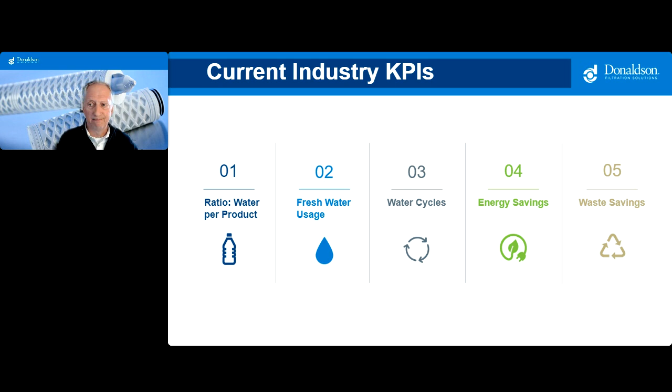Steering the conversation back to sustainability, let's break this out into parts. First, how much water is being used to manufacture your product? This then leads us to examine the overall usage of fresh water and tools on how to reclaim or recycle this water. This can lead to potential savings in energy and reduction in waste. Later in this presentation, we will have a case study that looks at this from the perspective of a CIP system. But before we go any further, I'm going to pass us back to our moderator, Seth, for our first poll question.

Thank you, Scott. All right, folks, our first poll is now live. And the question is, who is responsible for the measurable impacts of operational efficiency in your plant? A, maintenance manager, B, production manager, C, quality manager, D, all of the above, or E, I don't know. Please take your time to carefully consider each option.

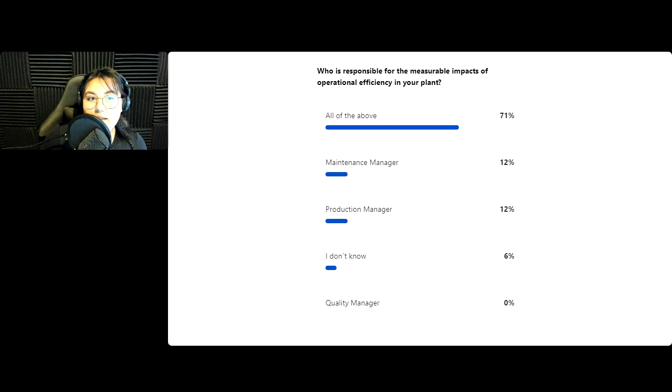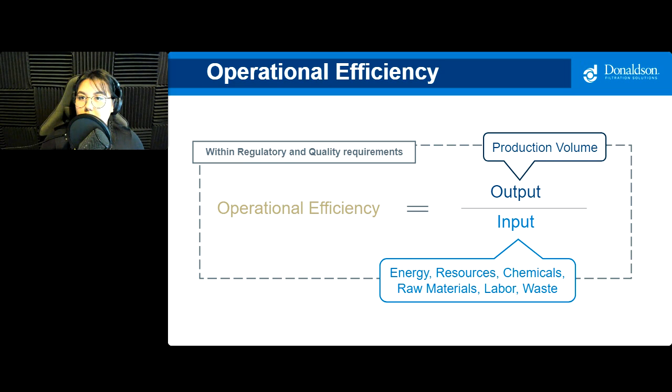Thank you, Seth. And to those who answered our poll question, I'm very happy to see the results. So let's look at operational efficiency. Here at Donaldson, we define operational efficiency as having the ability to reduce waste in time, effort, and materials as much as possible, while still producing high-quality services and products. This all must be done within the strict guidelines and regulatory demands, both internal and external.

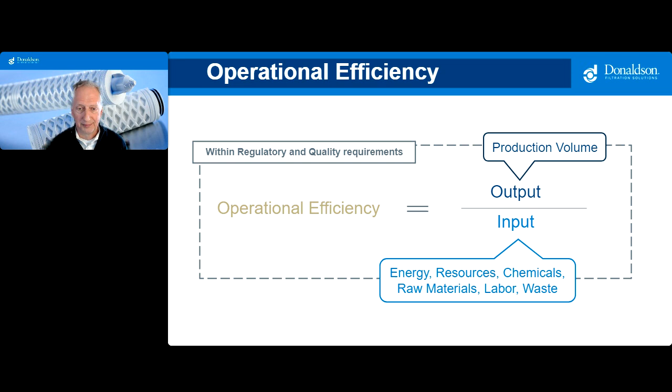To help unpack this concept a little further, I'm going to pass this over to Dominic, who sits in our manufacturing location in Haan, Germany. Hi, Dominic. How are things today? Hello, Scott. Yeah, things are very good in Germany. It's very sunny today. So yeah, let me also welcome everybody to the webinar today from my side.

And as Scott already mentioned and introduced our topic of today, operational efficiency, we want to break down that concept a little bit more. So how do we reach efficient operations in our productions? We categorized it here into three big groups: the process, the technology, and the people. On the process side, first, we need to build all of our installations with efficient design in mind from the beginning. And that usually also leads to concepts like automation or standardization, because only with automation and data collection, things like predictive maintenance and downtime planning become feasible and much easier.

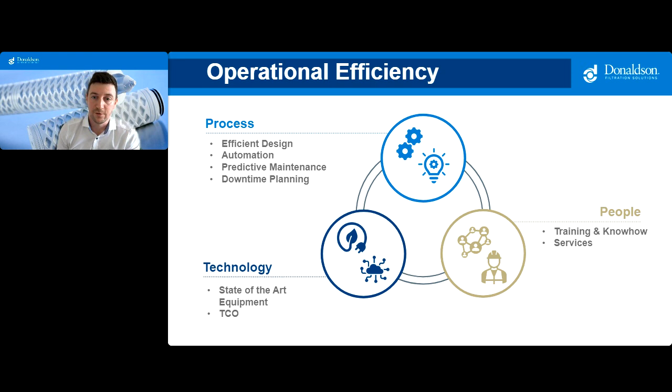On the technology part, of course, we need to invest in state-of-the-art technology to keep up with the demands of the current industry, while still keeping a very close eye on our total cost of ownership, or TCO. And probably one of the most important factors in how to reach operational efficiency are the people in our plants. They need to have the necessary training and the necessary know-how to perform as efficiently as possible. And all the necessary services, be it first-party or third-party services, need to be in place.

So the concept I just showed is basically applicable to all of your process equipment. And in the next chapter now, we're going to look especially at how to apply that concept and those principles to filtration. So what is filtration's contribution to operational efficiency?

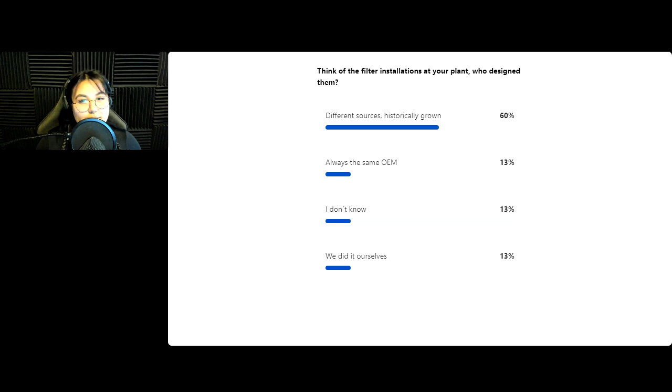Thank you, Seth, and thank you everybody for answering that question. I think what we see here, that different sources and historically grown is the most clicked answer, is very representative of what we see all over the world. Because most filtration installations have historically grown and were not really designed with all the influencing parameters in mind, which you can see here on the slide. Because there are so many critical parameters we need to take care of when we are implementing a filtration solution.

The one most people think about is the filter lifetime. A filter needs to last as long as possible. So filter lifetime is very important for us to keep our TCO, our total cost of ownership, in check. And that usually also means we need to have low differential pressures, which are mandatory for low energy costs. But there are many other connected resources that we also need to take into consideration when we are talking about total cost of ownership. The filters may need to be cleaned with chemicals, or they need to be sterilized with steam or ozone.

And every single one of those steps will come with labor, and labor also contributes to your total cost of ownership. But most importantly, we can optimize filtration installations for cost savings as much as we can, but they are still a critical food safety control point for your product and process integrity. And that is because they are removing those bacteria, they are removing those particles from your product or process.

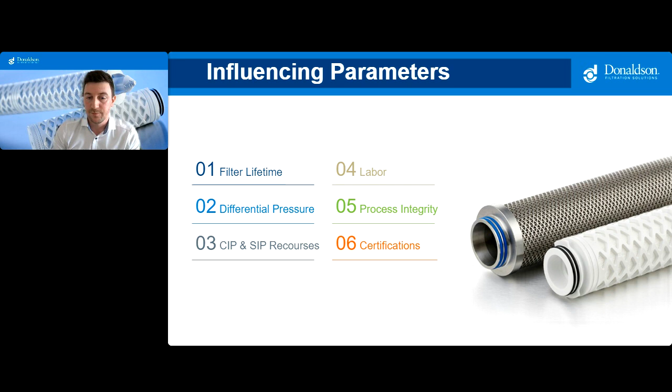So what I want to do is pick some of those points and go a little bit deeper to see what the actual impact is we can have on that. First, we can have an impact on resources. Probably many of you know about the influencing parameters for cleaning equipment with chemicals, the so-called CIP process. Because to create an efficient cleaning process, you need the right temperature, the right contact time, the right concentration or type of chemical, and you need a mechanical process of having contact with your cleaned surface.

So that means you either increase the temperature, the time, or concentration to increase your cleaning impact, which means you will increase costs. And if we now look at, for example, liquid filtration, those can usually be regularly cleaned with CIP steps. So once they have built some differential pressure, you can do a CIP process and that differential pressure can be reduced again. So the key now for most efficient and cost-saving cleaning processes is to make data-driven decisions.

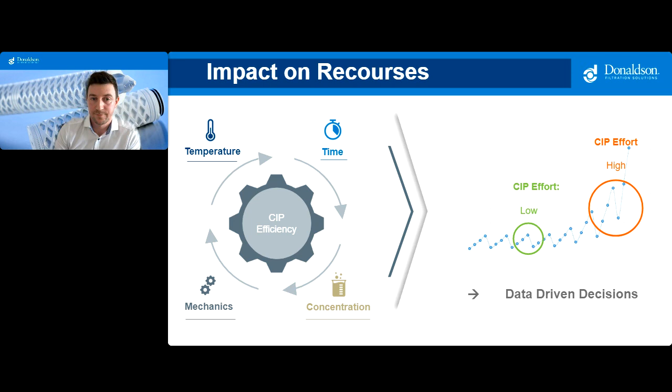The next one here is impact on energy. And I want to tailor this a little bit more to compressed air installations. So here we really want to focus on your compressed air lines, because they tend to have much unnecessary energy loss that can actually be addressed. First point here is leakage control. Any small leakage in a compressed air line can create an energy loss, and that can be directly calculated to a cost loss per year.

So you can see here an example in the table of a 1 square millimeter leakage. Imagine you have multiple of those leakages across your line and they are not attended. That can lead to quite a big cost impact per year. So regular leakage controls are mandatory for an efficient compressed air line. Also, any pressure loss or differential pressure in a filter installation correlates directly to an energy impact. And there's kind of the rule that 1 bar of differential pressure in your line will roughly translate to 10% higher energy demands.

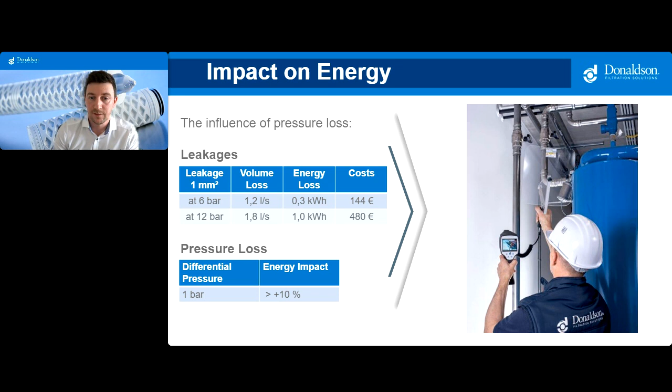So I think all of this shows pretty much that we need to investigate all those operational efficiency parameters we showed before, the process, the technology, and the services, to address the efficiency. And as a last detailed point here, I have impact on waste. Because when we're looking at your KPIs on waste, this starts usually with the manufacturing sites of your filter supplier. Donaldson, for example, we follow this cradle to grave

product sustainability impact process. And through this process, our filter development teams try to better understand from the beginning and quantify the sustainability impact of product design decisions throughout a product life cycle. And this life cycle begins at Donaldson with the right material and process decisions, but it continues to our customers with the inline performance and end-of-life considerations.

So basically, as we showed before, we need to achieve high lifetimes and make data-driven decisions to reduce the amount of downtime and waste, which results when we need to change our filter way too often. So rather than changing a low-cost filter element every week, we should aim for longer changeout periods with more premium filters, measuring the cost impact not by the price of one filter, but with the total cost of ownership in mind.

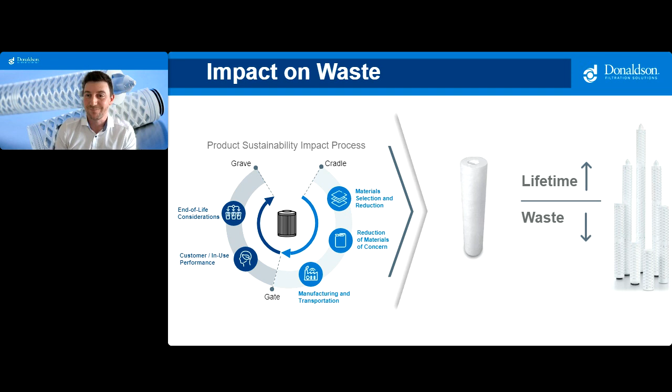So I think this was a little bit of a deeper look now into efficient filtration design, and Scott will now walk us through some real-life examples and some case studies. So please, Scott. Thank you, Dominic. Let's take a look at 4 separate case studies that I think directly relate to some of the items Dominic was just mentioning.

Our first case study really speaks to the reduction of waste, but also helping to improve filtration performance. Our first case study is from a global beverage manufacturer who approached us concerning a problem they were having with their RO membranes. Their RO membranes had not been meeting the typical life cycle benchmarks in life performance, even with the current pre-filtration steps in place.

Using our regional service teams, we conducted tests on the facility's incoming water using common methods. For example, a silt density index test was performed here at this site and determined that the total suspended solids levels were way too high. This led to a process improvement project on the RO's pre-filtration step. So pictured here is the exact drawing of the solution Donaldson provided.

As you can see, it is a manually operated but yet integrated system where we installed high surface area filter elements, commonly known as high flows. The important thing here is that it provides exceptional flow characteristics and dirt holding characteristics, and ultimately much longer service life. And the most important topic is that it provided the needed protection to the reverse osmosis membranes. This functionally led to very long service lives and ultimately increased protection to these membranes. Outcomes here, as mentioned on the slide, are reduced costs and waste.

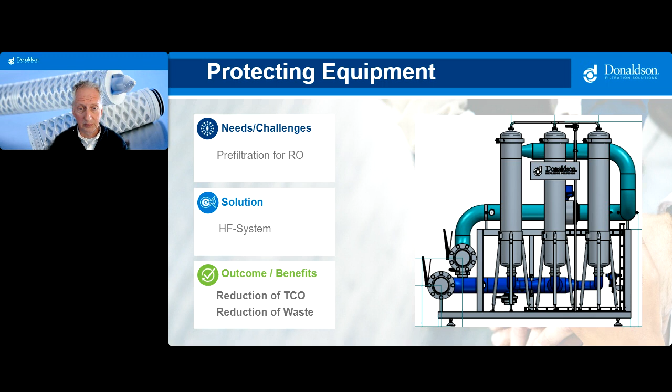The next case study is something that I've spent a lot of time on, and this is pasteurized equivalent water. Now, it's been popular within the dairy industry for many years. Now we are hearing from other beverage manufacturers on the same topic. The question is, how can I reduce the load on my pasteurizer by using alternative means? It is even more important to seek alternatives to traditional pasteurization when we look back at consumer trends that I mentioned earlier, specifically at functional beverages that have ingredients that are not heat stable or do not survive UV disinfection methods. Standing out as a possible solution is microfiltration.

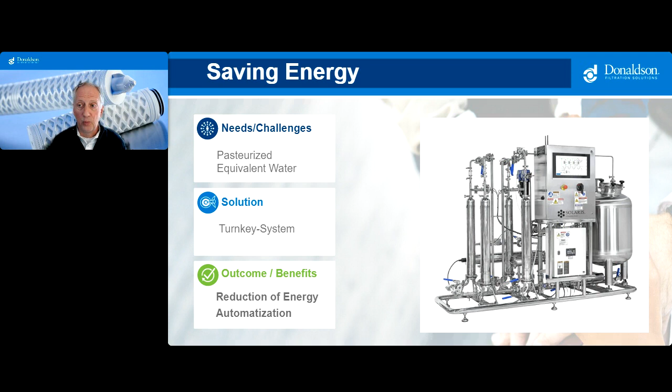Using select dead end or full flow filter membranes that have specific microbial retention values, integrated into a fully automated system like pictured here, can help provide twofold benefits: targeted energy reductions and savings in time without sacrificing product safety.

Next, we're going to look at the concept of water reduction. Now, you may recall I mentioned this particular case study. Recovering and reusing cleaning solutions from clean-in-place systems is an effective method to optimize spend and reduce environmental impact of that CIP process. Reduction is the key concept here. Reducing water consumption by recovering your secondary rinses can lead to savings in makeup water and chemical feeds. There's also the potential for the reduction of effluent from your facility.

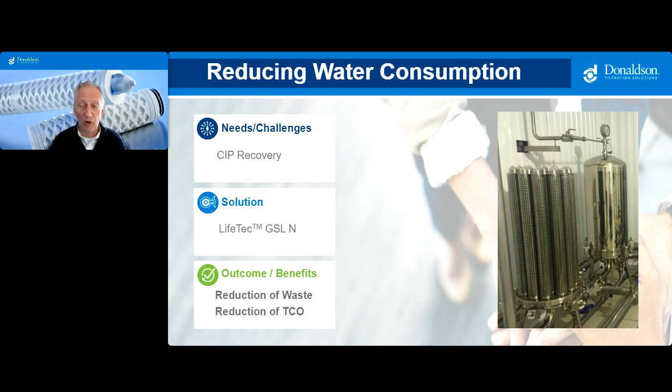Pictured here is a manifold filter system utilizing Donaldson's backwashable LifeTec GSL N filter elements. These filter elements are made of 100% stainless steel and are used to reduce solid levels before reclaiming, reusing, or further processing CIP solutions. By using 100% stainless, we can provide an efficient and robust solution that is not susceptible to typical CIP temperatures and pH values. This leads us to realize reduction in waste and overall reduction in total cost of ownership.

Saving on resources. Dominic had mentioned compressed air, and so I'm going to kind of continue with that theme. Using ozone as an agent for sanitization is very effective, especially when there is a need to produce an aseptic environment, such as found in a buffer tank. Ozone production can require compressed air. This compressed air usage can be reduced when using an ozone-resistant sterile-grade filter element like Donaldson's LifeTec SRF V cartridge.

As a standalone, this cartridge, or when used in combination with ozone, can provide optimized solutions for maintaining sterility. And again, this would be typically in an aseptic environment. And as I mentioned earlier, this buffer tank is a typical application. This optimized solution affords increased protection to product and product contact surfaces, and the implied energy savings by reducing demand on your compressed air system.

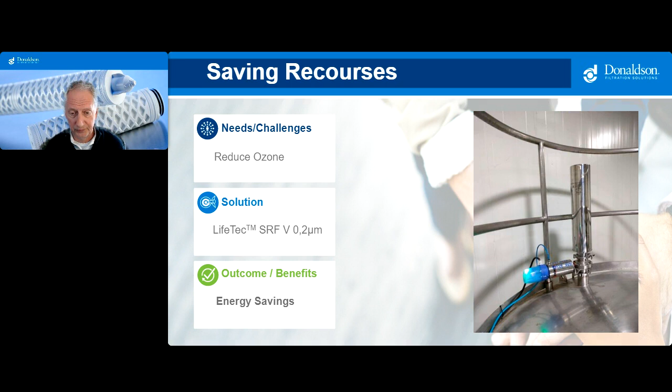Now I'm going to pass the presentation back to Dominic for our last chapter, and that's, what does a roadmap look like? Dominic: Yeah, thank you, Scott. Thank you. So yeah, let's look at your road to operational efficiency in filtration. So how can we now optimize and start contributing to those KPIs?

So first, I want to introduce you, of course, to our Donaldson teams that are supporting you on this journey. At Donaldson, we do understand the importance of process optimization and maintaining the efficiency of filtration systems with our subject matter specialists, like Scott and myself. We are providing that training and best practice, and we are in close contact with more than 100 of our local support teams who are supporting our customers directly around the globe.

Additionally, we are aligning global key accounts worldwide with our strategic key account team. So they are aligning on and sharing the most efficient filtration solutions and the know-how necessary to implement them. And when it comes to services, Donaldson does support our customers with our field service team, and they are proficient in, for example, ISO 8573-1 compressed air quality class audits, or doing leakage control tests, as we have seen before. And they are also helping our customers to implement filter management systems, which may also include integrity testing.

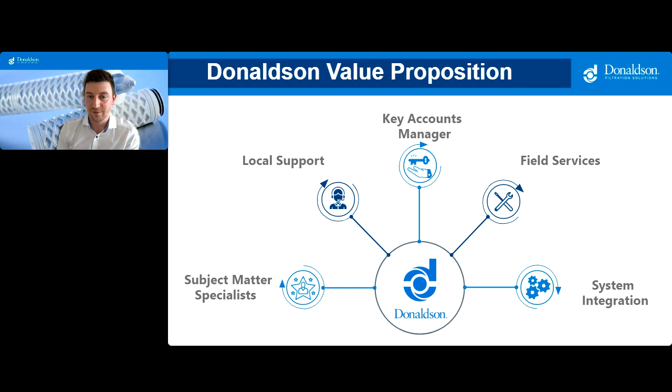And additionally, we do have on the right here our system integration team, because as a filtration expert, Donaldson also provides both plug and play and custom filtration systems via this team. And they are designing those solutions with efficiency in mind from the beginning, which is, again, very important for the process.

And then we perform what we call a technical site assessment. And we're using our subject matter experts, but also our local team and our service team during these site assessments. And we look at ways to support the integrity and efficiency of your production process and compare all filter installations to the filter best practices in our experience.

After the site assessment, you will usually get a full site assessment technical report, and that report will include an action plan, and that action plan will be prioritized. Each of those findings will be prioritized for you, and then you can execute those individual projects for optimization or addressing certain risks on a local level with your local Donaldson contacts.

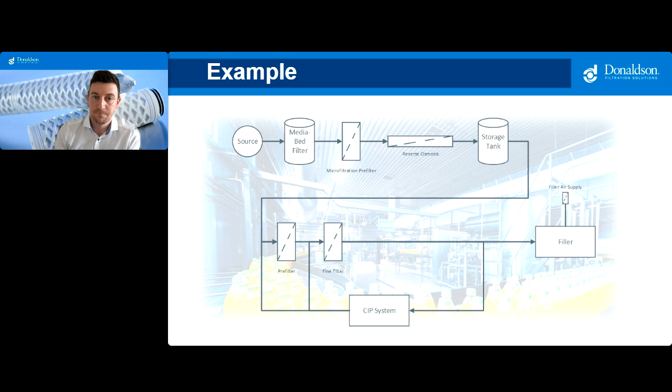And we talked a lot about the compressed air lines. So we can start optimizing in terms of energy reduction, in terms of ozone reduction, and resources. And Scott has already shown the CIP purification or CIP recovery system before in the case study, so we can also look at CIP savings.

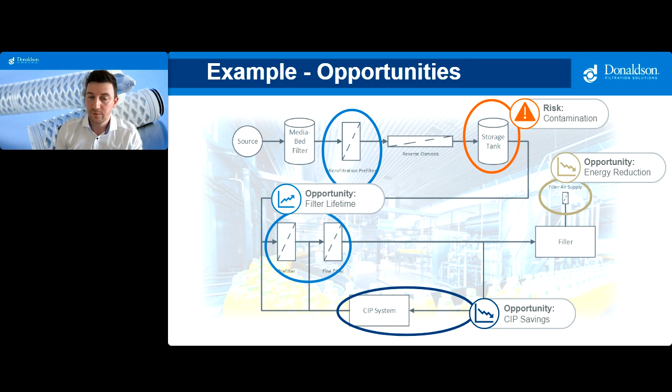And once we have addressed all this, then here you can see possible implementations after a site assessment. So they are, for example, addressing all potential risks with state-of-the-art filtration solutions, reducing the resources and energy consumption from source to application on your compressed air line, saving on CIP resources with a CIP recovery system, and optimizing the filtration lifetime and reducing your overall TCO and downtime by performing, for example, filterability tests at your liquid stages and finding the right optimized filter combinations for your type of water or product.

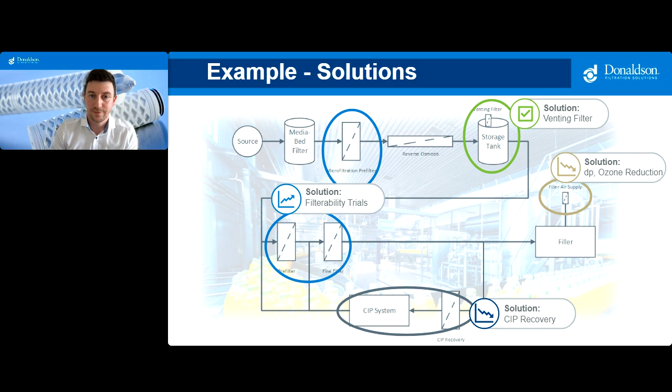So before we close this out now with one last poll question, I want to give a final overview over the offerings and portfolio of Donaldson. So Donaldson does offer all the relevant filter elements for liquid, gas, and steam, and we branded that as our LifeTec filter portfolio. And we do offer for compressed air and gases all the equipment necessary to achieve certain ISO 8573-1 classes from the compressor to the point of use, including, for example, fridge dryers or adsorption dryers, and also all the connected services. And finally, we have already talked about our system integration team, which are offering those plug and play and custom systems, which can fit very well into your process.

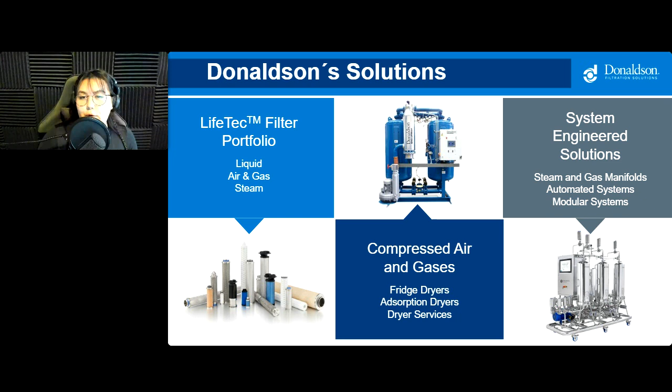How many individual filter installations do you have in total in your plant, liquid, air, and steam? How many individual filter installations do you have? A, 1 to 2, B, 3 to 10, C, greater than 10, or D, you are not sure. We'll take a moment to let everyone have a think and interact with the polls before I hand it over to Scott to close the presentation.

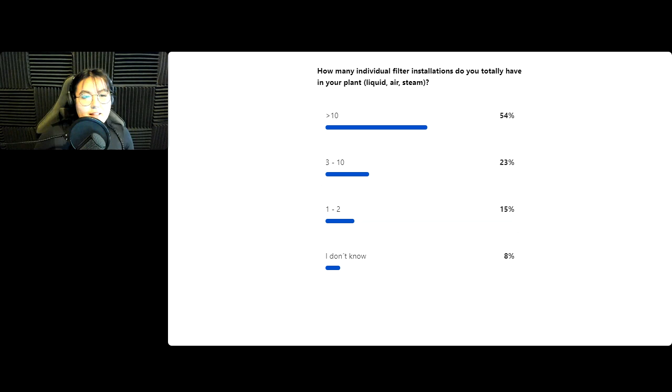So, the key word here is imagine. Whether you're a local or a global producer of beverages, there are savings potentials available to you when you dedicate time and resources to achieving filtration optimization. Whether you're looking to reduce artificial load on your process utilities, like compressed air or your steam system, or increase filter element lifetimes or reducing water usage, Donaldson, with its 100+ year history, is here for you. We bring innovative filtration solutions to your facility through a very personal, collaborative process that we have designed to make sure that it benefits you and your company.

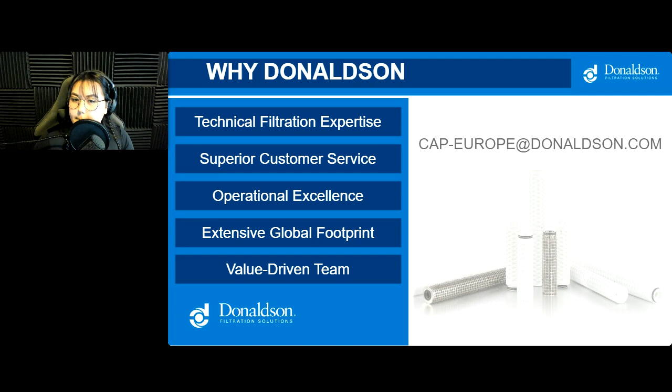How do we request a site assessment and how much does it cost? Okay, yeah, I think I can answer that because we did not mention that. That's true. So first of all, the logical way is to contact your local Donaldson contact person if you are already in contact with Donaldson. If you're not in contact with Donaldson, we have here on the screen the CAP-Europe email address, which gathers all the requests for site assessments for us, and then distributes it out to the local teams, involving also the sector specialist team and the expert team and the services in the regions.

So yeah, I would appreciate, especially for the people here in this webinar, if you want to request a site assessment, please use this email address, and we will probably be able to offer you a free site assessment for the first time.

Perfect. Well, thank you for that, Dominic. Another question that we've got is about the RO membrane. Earlier, you mentioned the life cycle of RO membrane. What is the typical industry benchmark for lifetime? Is an RO sterile?

Yeah, I can take that one. Question? Yeah, that's good. That's good.

So historically, in beverage manufacture, where we're looking at water as the main ingredient, with proper pre-treatment of the incoming water into the RO membrane, I've seen RO membranes go 4 to 5 years. And to answer the question, is the effluent or the permeate off an RO membrane sterile? Reverse osmosis membranes have the ability to remove organisms of concern, but you really can't validate it or steam sterilize it. So in my world, I don't consider it sterile.